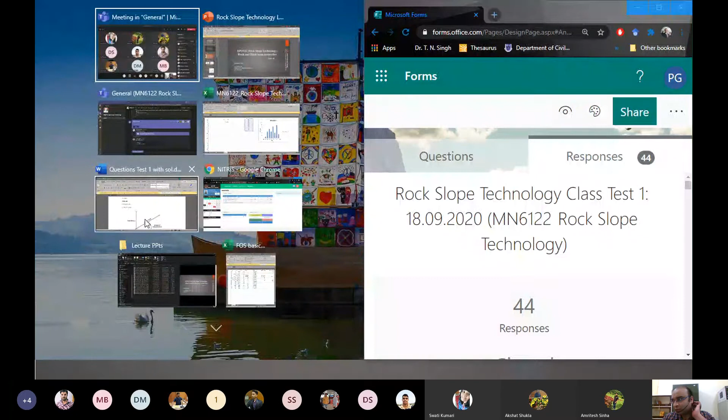What I wanted to see was if anyone has any issues with any of the questions, but we can also do one thing - we can go through quickly anything that had some issues. So I have some statistics with me.

MS Teams provides that. So the first question was about fly ash - I think quite a good amount, 75% almost, of students were correct.

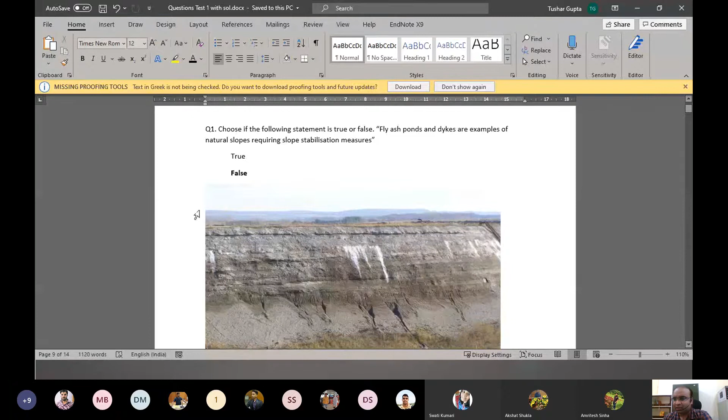So the point in the fly ash question was about natural slopes. The statement said fly ash ponds are natural slopes, but that's untrue - these are man-made slopes, generally made when coal is burnt in a power plant, and fly ash, basically a residue, has to be stored somewhere. We discussed in our first class how different types of slopes are there and which are the natural and man-made slopes. So fly ash is a man-made slope, not a natural slope. That's why the question was false.

Okay, let's keep them side by side. I think that will be easy. Which questions were the most problematic? We'll see. So the next question was about what is the scope of a slope engineer?

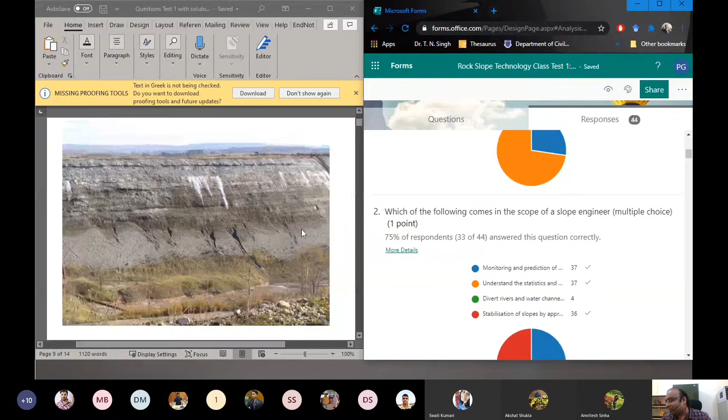I think this was quite obvious, except for the diversion of rivers and water channels. I think all other things were in our scope. So as an engineer, we have to see all these things: stabilization, understanding of the statics and dynamics, and monitoring. So everything comes - this option was just given as a false option.

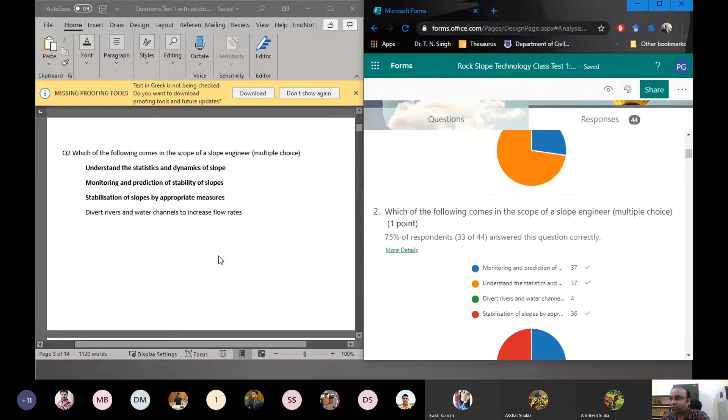So the work of diverting rivers and water channels is not for a slope engineer - it's for the civil engineers who are working on that side. And a good example is, if you are aware of Umrer mine, there is a mine in Western Coalfields Limited, Umrer mine.

It used to have a big dragline, and the dragline was used to put the overburden material from one place to another, and a river went through nearby. So what they did was, because initially the river was going through the property of the mining lease, they diverted that river for working purposes. Slowly and gradually, the river actually started getting through the main mining area as the depth increased, and some improper control happened so that the base on which the dragline was established got weakened due to that river, and the full base failed along with the dragline.

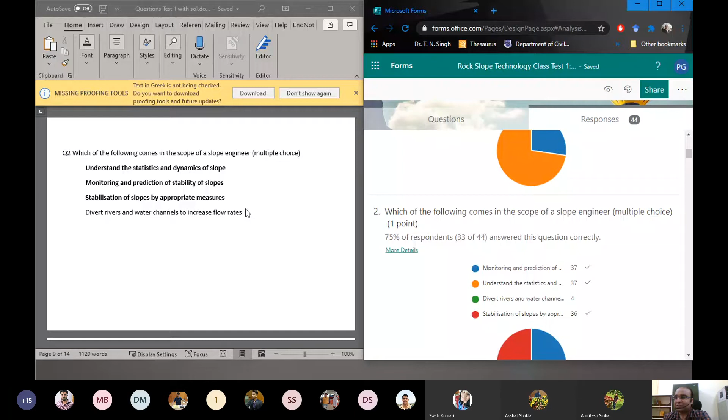So that was an interesting case where rivers and channels were also involved, but that's not strictly the work of a slope engineer in general sense. So that was one.

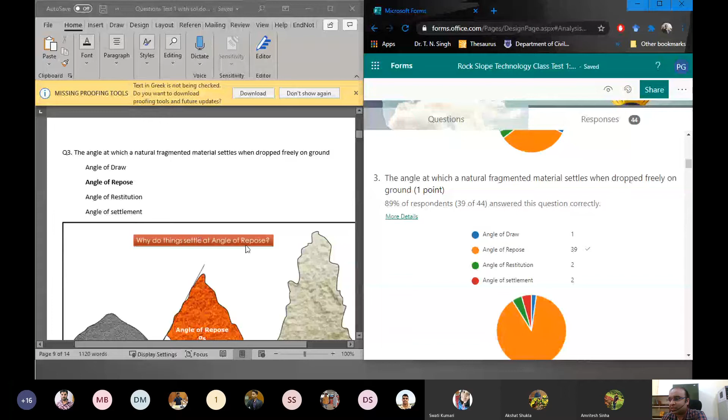This question I think most of you got - what is the natural angle that fragmented material takes when they are dropped? So angle of repose is that. We studied about that, why angle of repose is what it is, which are the factors affecting angle of repose. And then we had the adhesion cohesion question.

The point was attractive forces between similar particles. I think whoever got confused might have been confused due to the figure. What we learned was cohesion is between similar particles, adhesion is between dissimilar particles - very easy. So most of you got that correct.

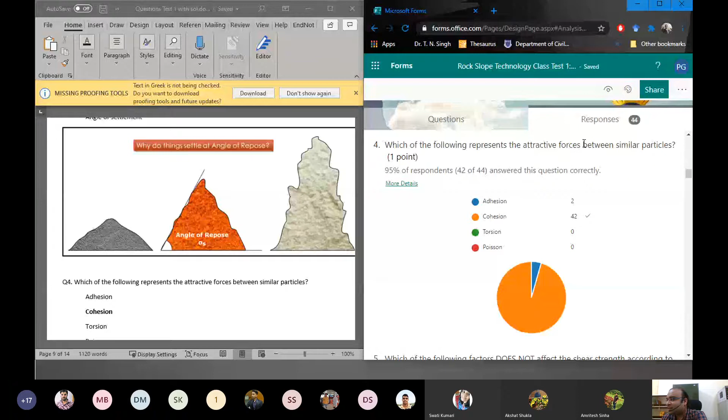This was about which factors do not affect shear strength, and this part was very important. That's why I boldened it up. It's basically very simple.

This is the Mohr-Coulomb criteria, and we see which are the variables. So sigma, phi, and c are the three things affecting shear strength. So those should not be correct options. The only correct option is shear stress, which doesn't directly change the shear strength of any material.

That was the correct option. I think some of you got confused with friction as well. So friction is here as tan phi. Tan phi is basically the friction component. Do remember that.

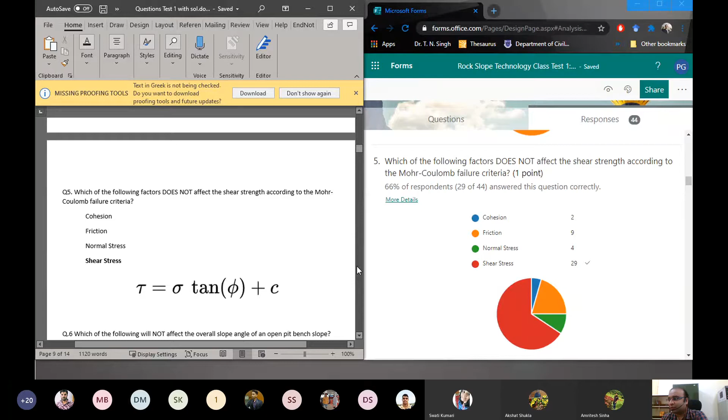Next, this was about the stability of the slope, which does not affect the stability of slope. I think it was a very simple question, so most of you have got this.

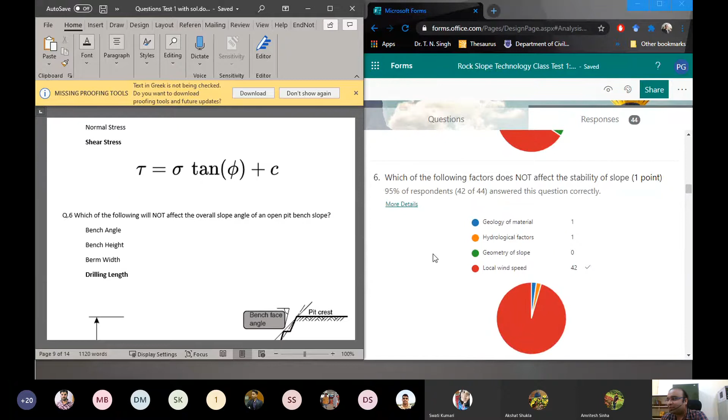So those who have not: it's local wind speed. Even though it may have an effect of erosion over a long term, it may erode the slopes, but on the time scale we work on, local wind speed is not considered for our slope stability issues. Other properties like geology, hydrology, geometry are much more sensitive. So the last option was incorrect, or the correct option in that sense.

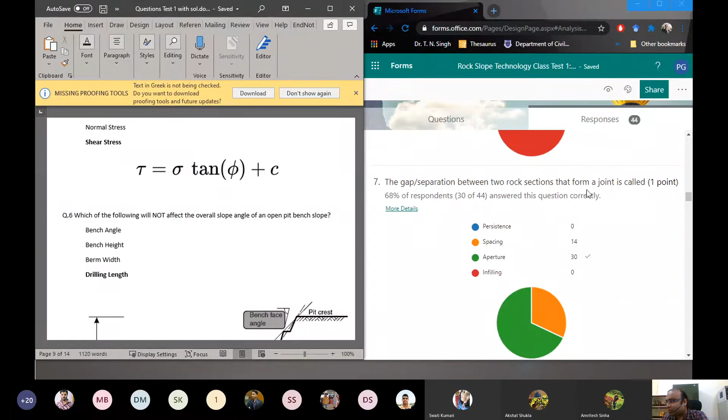Next was the gap. The gap or separation between two rock sections that form a joint is called. I think many of you were actually confused in this, so let me show you what it actually means.

We discussed this once. What is spacing? Spacing is actually the gap between two sets of joints. If these two joints are there, the distance between these two joints is spacing. But that's not what the question wants. The question is the gap or separation between two rock sections that form a joint.

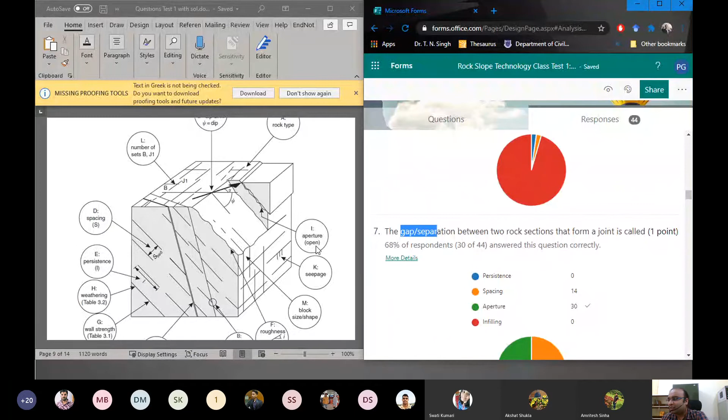So it basically wants to know what this gap is called. This gap we discussed is called aperture. Aperture is basically the middle lying area. It can be open, then we talk about aperture. If it is closed or filled, we talk about width. It can be filled or not filled based on what kind of joint it is. So this is called the aperture of a joint.

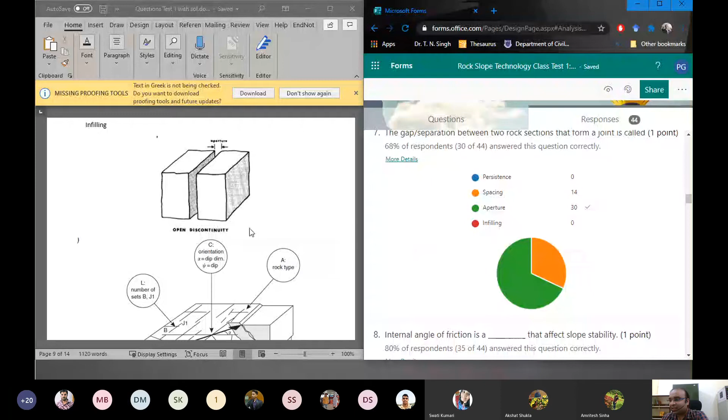Between the two rocks, that's what the question asked. I think 68% of you got that, which is good. This might be a little confusing, spacing and aperture. So that's the difference we have to know: spacing is between two joints, and aperture is a single joint gap created due to that discontinuity being there.

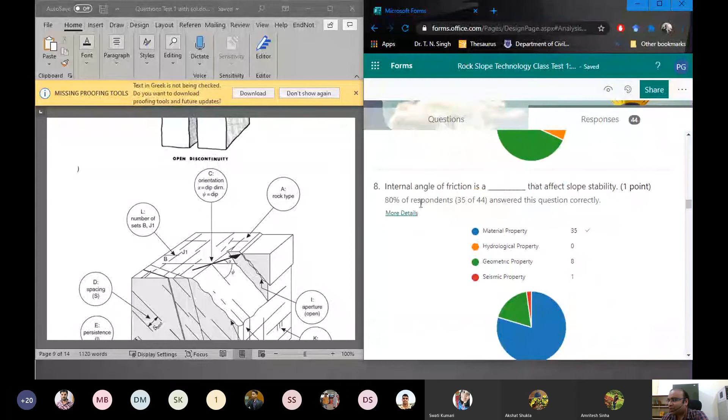Internal angle of friction is a material property. Do not confuse it with friction or the friction angle. It is a bulk property of material, but some people got it confused with geometry. There is a difference between internal angle of friction and any other friction we talk about. We'll cover that later on.

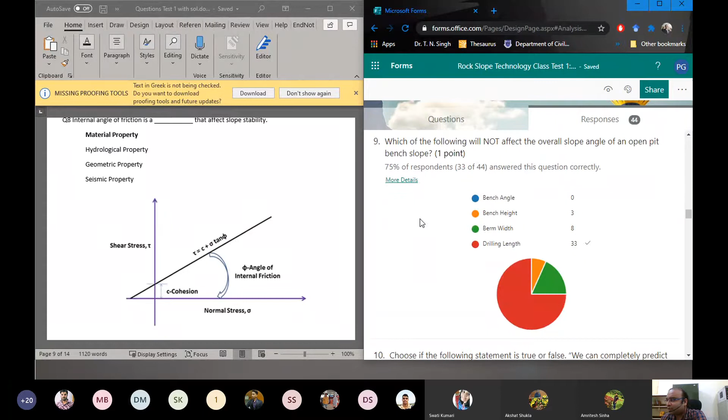And what next, this was: which of the following factors does not affect the overall slope angle of the pit? For that, a very simple exercise was how we calculate the open pit overall slope angle.

We had to know about bench width, bench height, bench angle, ramp or berm width, all these things we have to find out. So that's why drilling length here was an incorrect option. Even though in some cases bench height may be dependent on drilling length, it's not strictly a factor by which we calculate the overall slope angle of the mine or open pit. So drilling length was the correct option.

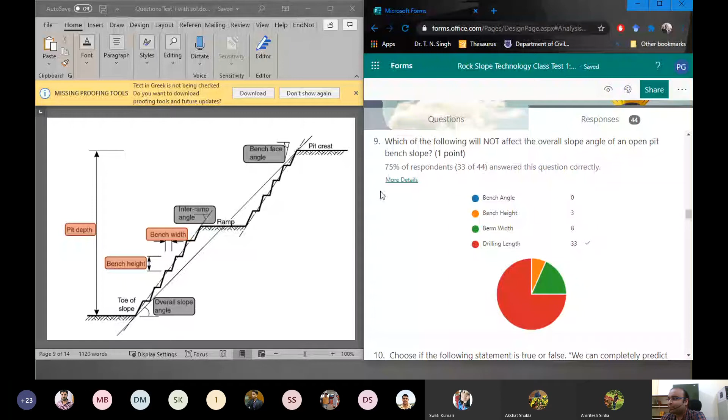Berm width is the bench width, or the difference in the horizontal things that are there. Ramp is also one of the factors, so berm width was that. Bench height you are aware of, and bench angle also, that's quite clear. So this was about how we calculate the overall slope angle, quite simple in this case.

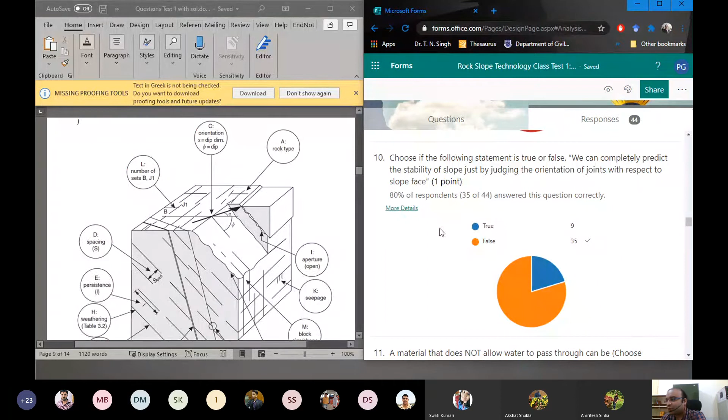We can completely predict the stability of the slope just by judging the orientation. We have seen many times that apart from orientation, there are so many factors affecting the joint itself, apart from slope stability. Orientation basically means at what angle the joint is, like dip and dip direction, but that alone won't be sufficient. There is friction, spacing, and so many other things. That's why 'we can completely predict stability by judging orientation' is incorrect.

So that's why it was false. False was the correct answer here.

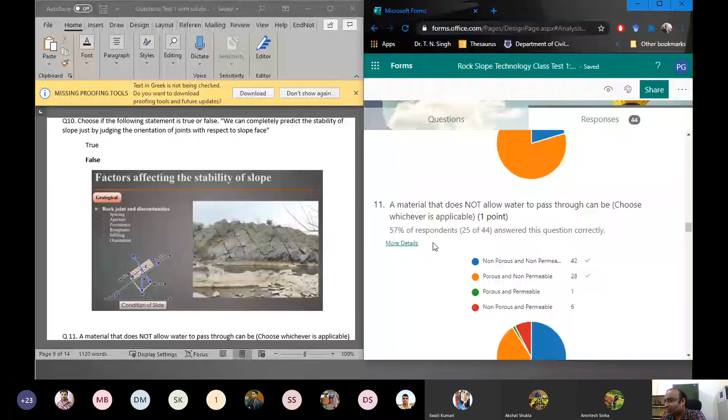And next was: the material does not allow water. So in this case, what we have to remember is something we learned about porosity and permeability. What kind of material can be based on what kind of pores are there inside and how connected they are, right? So a material can be like...

...non-porous, a totally non-porous material that doesn't have pores at all, so there will be no place from which any fluid or water can pass through, right? Then there can be a substance that has these pores, but they're not connected, like our sandstone or similar material that are porous in nature, but these pores are not interconnected that well, right?

And what else? Then there can be porous and permeable materials. Permeability - as soon as we connect these pores, the material becomes permeable, basically anything that can permeate or pass through. So these combinations of materials can be there, and we had to remember that in order to answer this question completely. So the material that does not allow water to pass through can be one of these.

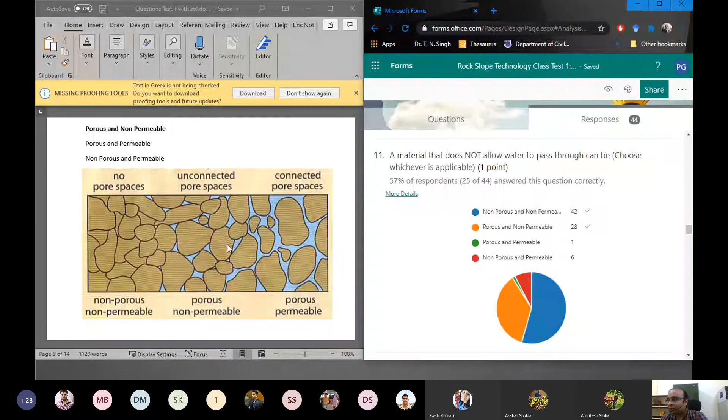So which of these cannot allow pass through? Whichever is not permeable. So the options which have non-permeable in them will be the correct answers.

This last option, non-porous and permeable - this material actually doesn't exist. There is no material that will be highly permeable, allowing material to pass through, but is not porous, except when we artificially drill holes in it. Then a non-porous material can also become permeable, but again that's not a natural material anymore, right? So non-porous and permeable - this kind of natural material doesn't exist basically.

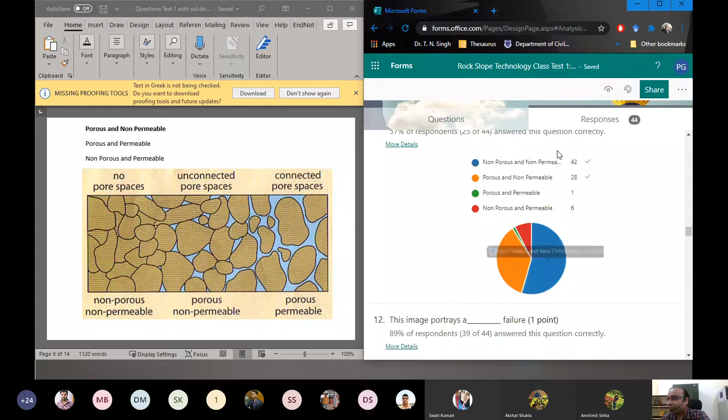So the two top options which were non-permeable, these were the correct answers, right? Quite a good number have already answered that. So good.

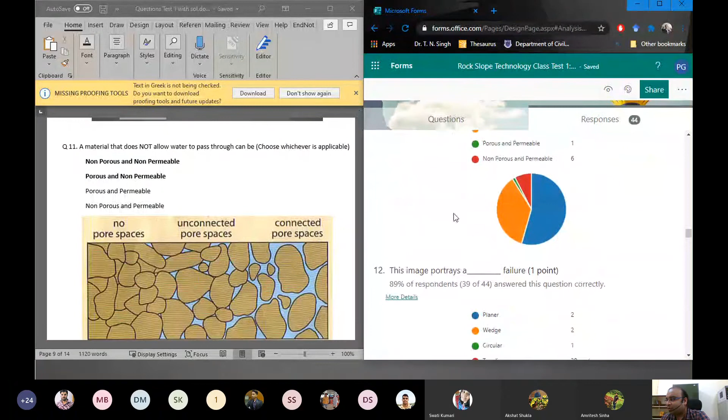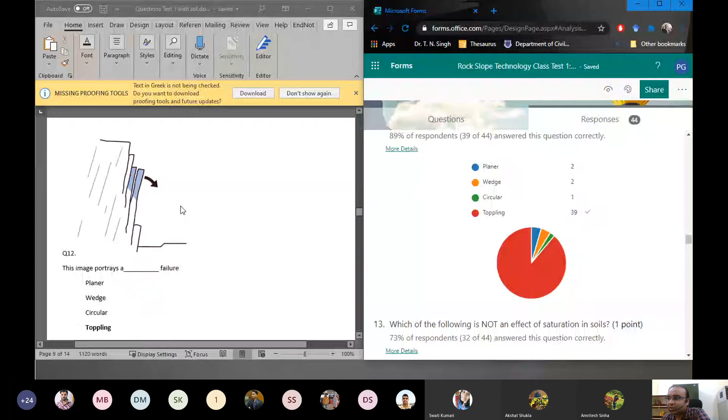And the image portrays - so the image actually was this one. I think some of you guys didn't get to see this image; it was on the left side of the screen being shown. So this basically, we know, is a toppling failure, right? The rocks are basically going to topple in cases where the angle of the discontinuity is against the angle of the face, and it should be such that separation takes place between these rocks or the slabs that are being formed, right?

But because many of you didn't see this image, we gave bonus points to all of you, so this was marked as correct for everyone. But next time we will see what to do about the images thing if any problem like that persists, right?

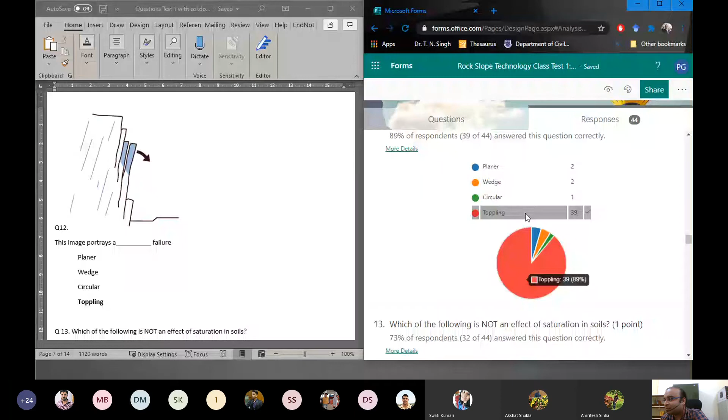So this was toppling. I think a good number already had the correct answer, but everyone else also got the point for that. Which of the following is not an effect of saturation in soil?

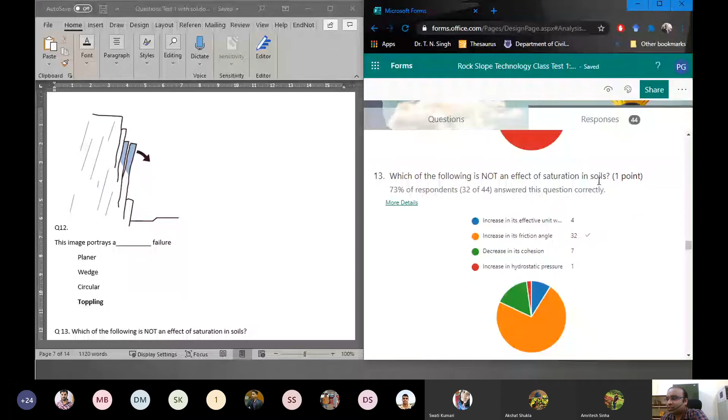So this was once we studied about how the hydrology works. The options were quite clear, but we have to read them a little carefully. So increase in effective weight, effective unit weight - that was because the pores of the material get filled with water, and the unit weight of the whole material when it's saturated basically increases, right?

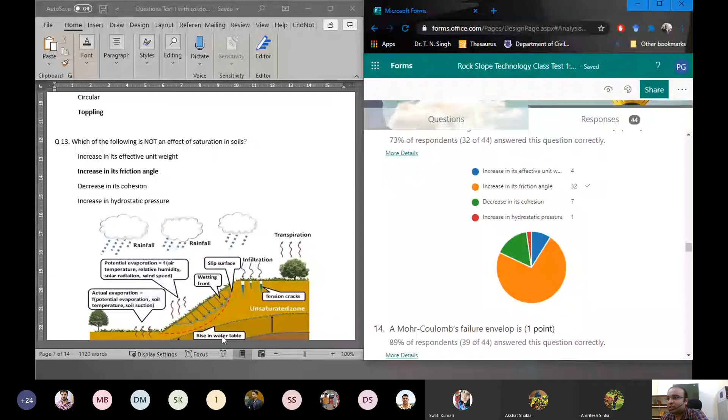Decrease in its cohesion - decreases, as we've seen in so many questions when we did factor of safety calculations, right? The cohesion was supposed to decrease when rains happen. So be it soil, be it a fractured material, be it discontinuous material, any loose components generally will lose cohesion, so their values will decrease.

Increase in hydrostatic pressure - that is most of the time true, because generally drainage is not allowed, and since we're talking about saturation having already happened, we've assumed the drainage has not happened basically. And when drainage has not happened, the hydrostatic pressure has built up. The head of hydrostatic pressure will be calculated by the height of the new water level. So these kinds of experiments or simulations we did when we were doing the hydrological part in finite element analysis or even in limit equilibrium analysis.

So in both of these cases we have not seen an increase in friction angle. Now this doesn't happen with saturation. There might be a decrease in friction due to water acting as a lubricating agent, but it can't increase the friction angle unless some special conditions are there, like a cement kind of material already present in dry state, and with water it reacts to basically form a cement concrete type structure. That can happen, but in general, when we talk about soil and saturation, increase in friction angle doesn't happen. So that was the correct answer. Those were all the effects of saturation, so that's why increase in friction angle is the answer.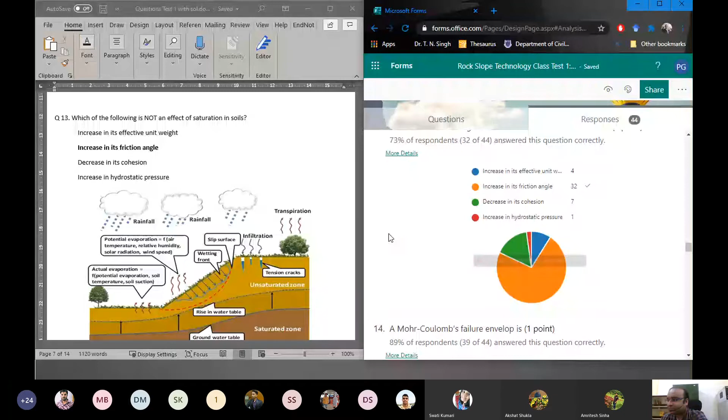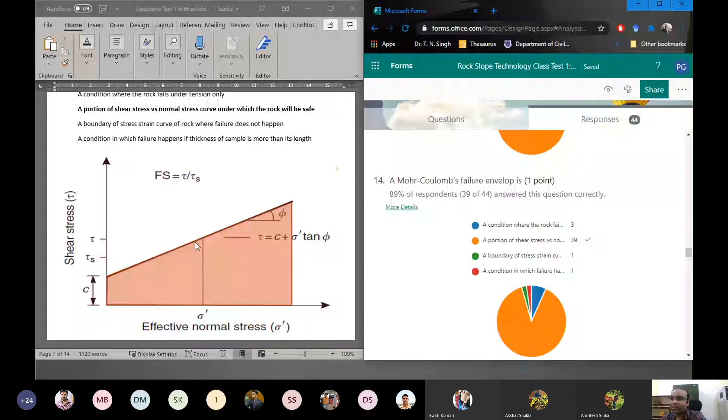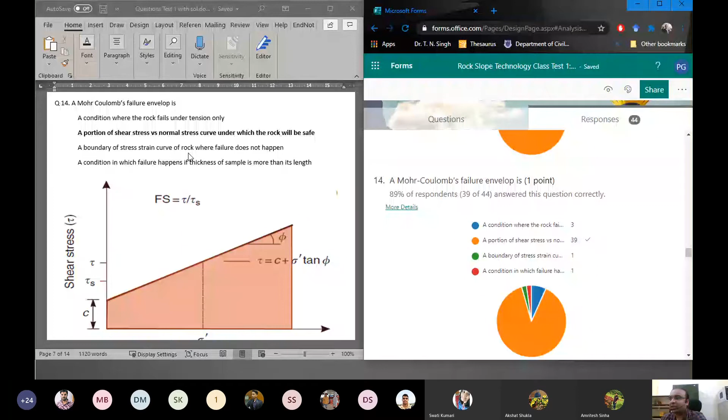The other options were just some other things: a condition where the rock fails under tension only, that is tensile stress - that's different. Boundary of stress strain curve of rock where failure does not happen - again, stress strain curve is not what we're talking about here. And condition in which failure happens if the thickness of the sample is more than its length - a very different condition. So nothing in relation with Mohr-Coulomb's failure criteria. So the second option was correct. I think almost all of you except one or two have answered this correctly, so quite good work.

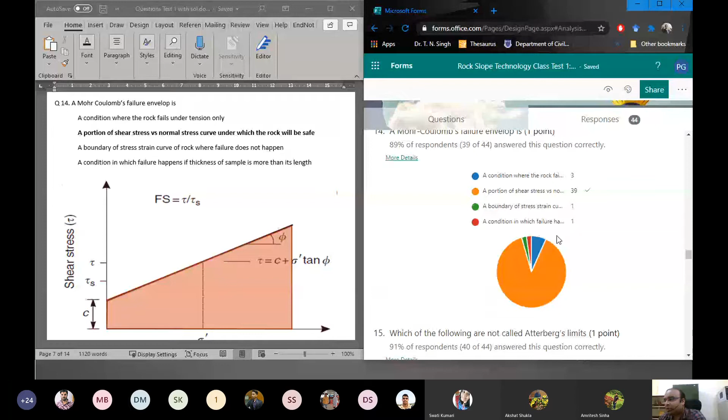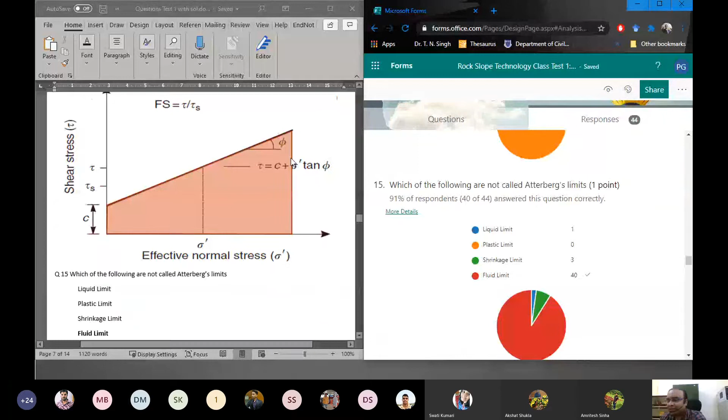Which of the following are not Atterberg limits? We discussed Atterberg limits briefly - what they are and what they are called. Liquid limit is the point where, after a certain water content, the soil or material starts behaving as a liquid. Plastic limit was the limit after which it starts behaving in a plastic manner, where the stress strain curve goes straight. So that was plastic limit.

Shrinkage limit was a point after which, if you removed the water content further, it won't decrease any further. So any shrinkage happening due to removal of water content while drying doesn't affect the volume change beyond that point - that's called the shrinkage limit. And fluid limit is not relevant here, but these three - liquid, plastic, and shrinkage limit - are called Atterberg limits. Generally these kinds of curves are made, and tests for all these limits are very different; a single test for all is not done, and all three values are calculated by different tests. We'll discuss in upcoming lectures how these Atterberg limits are calculated. So fluid limit was the incorrect choice, and quite a good number have again chosen the correct one.

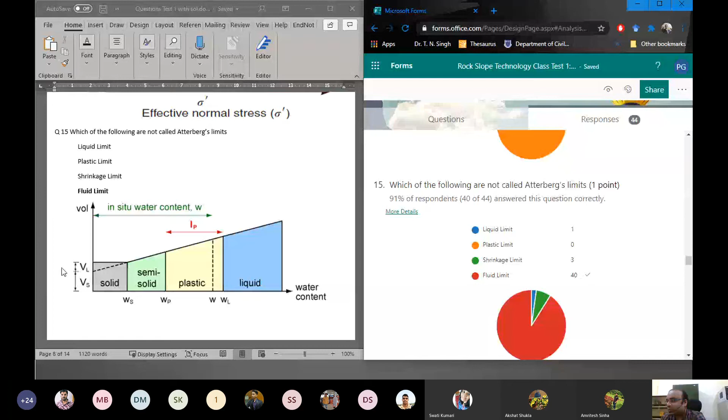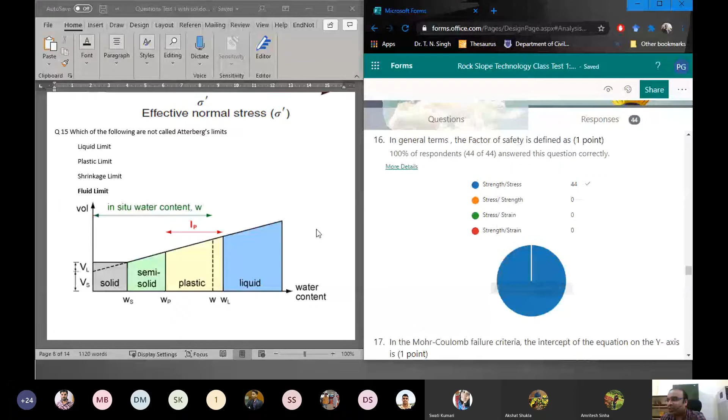The intercept of the equation on the y-axis for Mohr-Coulomb failure criteria. Just remember, when we saw the Mohr-Coulomb failure criteria, tau equals C plus sigma tan phi. Anything on the slope of this line basically gives us friction, internal friction. C gives us the intercept here. So the intercept on the y-axis is cohesion. So friction is the slope, but the intercept is cohesion - that's the difference. So the correct answer was cohesion.

In the next one, choose whichever statement is correct. Even though it was multiple choice, only one answer was correct. Somehow I think this should not have been multiple choice, but anyways.

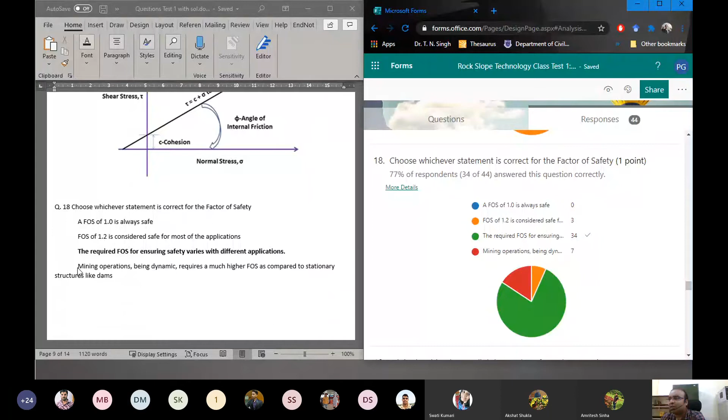This we were discussing when factor of safety was being taught, right? So factor of safety 1 is always safe - that is incorrect. 1.0 is basically a critically safe point, and it's almost never considered safe in most cases. It indicates a condition where the stresses are just equal to the strength. Any change in stresses will cause a failure, so it is very critically safe, not always safe.

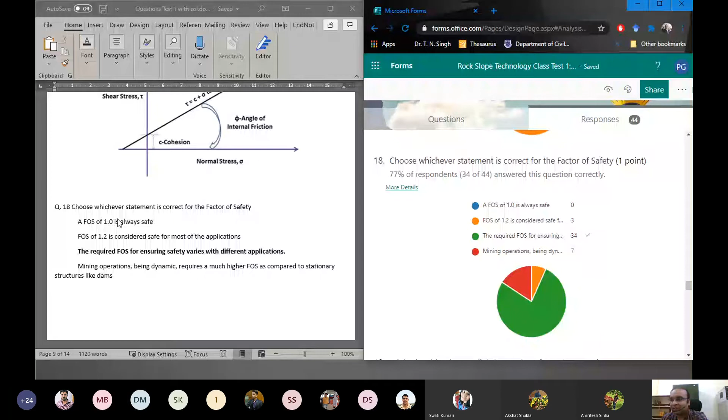Factor of safety of 1.2 is considered safe for most applications - that is again incorrect, because as per the correct answer, the required factor of safety for ensuring safety varies with different applications. We were discussing this about mines, about dams, about civil structures. So for each, there is a different critical factor of safety considered as the minimum requirement. That's what the correct option was.

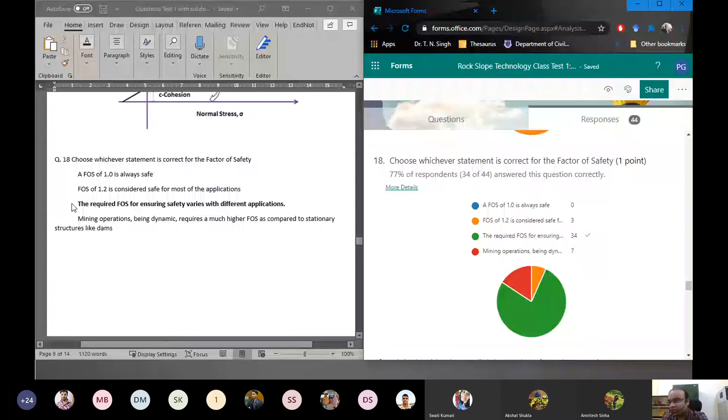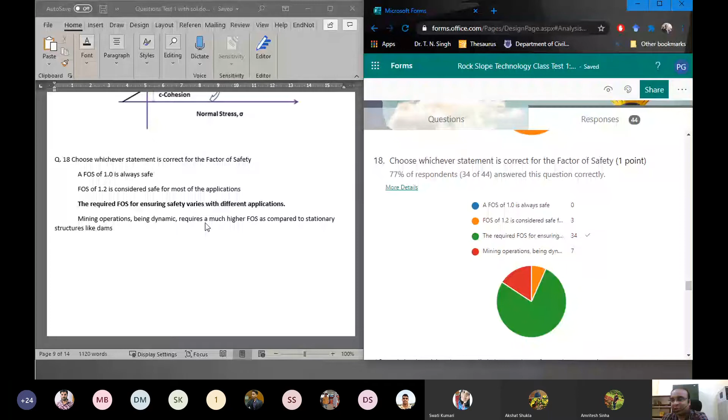The last option said mining operations being dynamic requires much higher factor of safety compared to stationary structures like dams - that was actually the opposite. Mines are dynamic but require very less factor of safety due to that same reason, compared to stationary structures which do not move. So dams, roads require much higher factor of safety, right? We discussed this in one of the classes. So the correct answer was the third one.

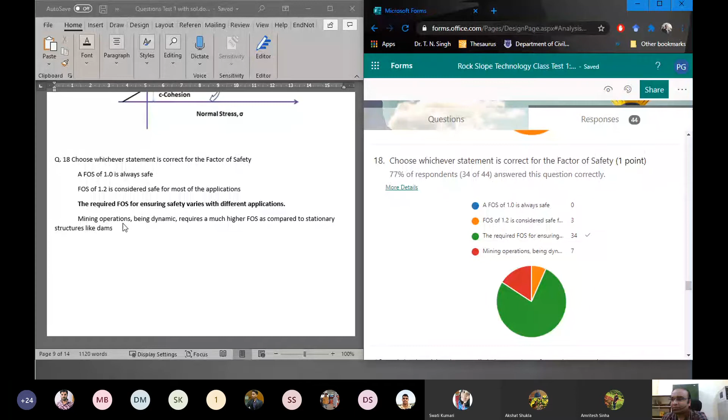Okay, daylighting - I think most of you got it, but the condition is the condition of sliding that we saw in many examples. The condition is very simple: when the angle of the discontinuity is less than the angle of the slope, and it is inclined towards the slope, that is the condition of daylighting. The joint is inclined towards the face of the slope with slope dip greater than the joint dip.

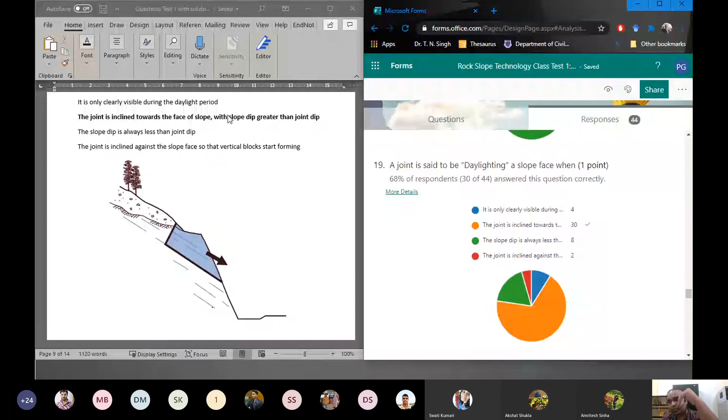So do remember that, if you have any confusion about daylighting. Daylighting basically is when these joints get exposed to the slope. So the only condition when they will be exposed to the slope is when the slope dip is greater than the joint dip. When this angle is greater than the joint angle, then these joints will be exposed on the slope. Otherwise they will either be inside or on top. So the condition of exposure is called daylighting - that's how you can remember it.

The other options were: clearly visible during daylight - that's just for the namesake. Slope dip is always less than joint dip - that's the opposite of the correct answer. And the joint is inclined against the slope - that is a condition of toppling failure. So that's not it. So this was the correct answer.

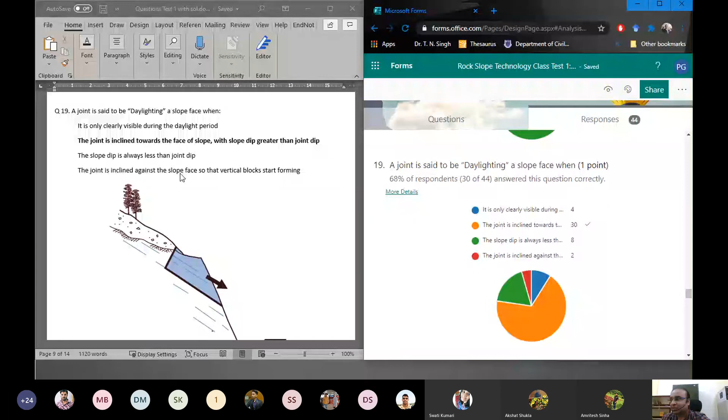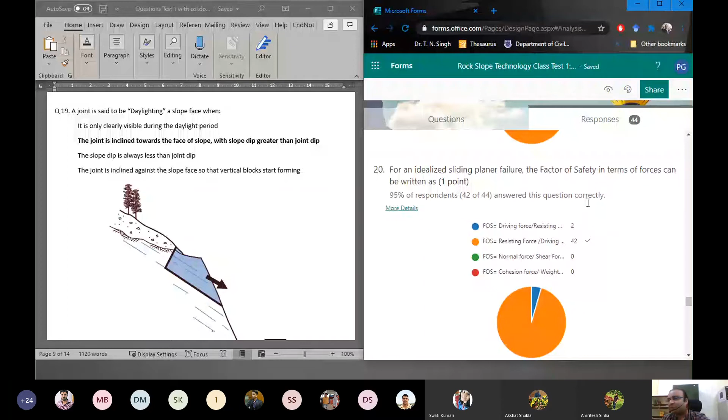And finally in MCQs, we had: for an idealized sliding planar failure, the factor of safety in terms of forces can be written very simply as resistive force by driving force. No need to get confused by the opposite one. I think most of you got it, so that was correct - resisting force by driving force, that was it.

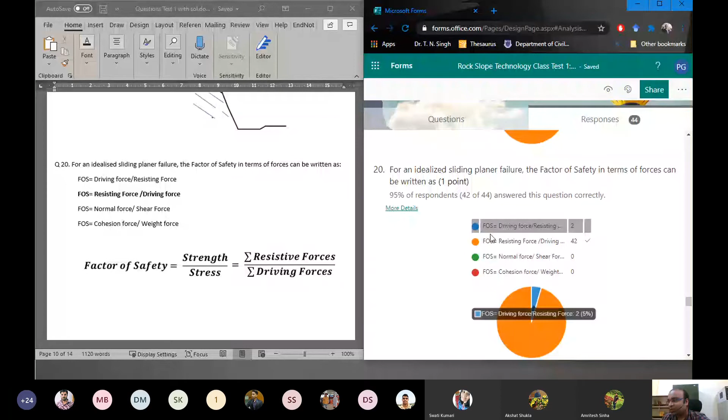So MCQs in that way, apart from few confusing terms, I think most of these were very simple. I would have liked that all of you would have got these, but yeah, that's okay.

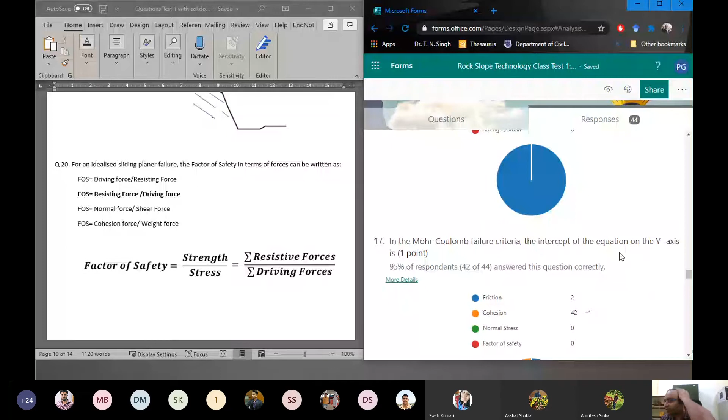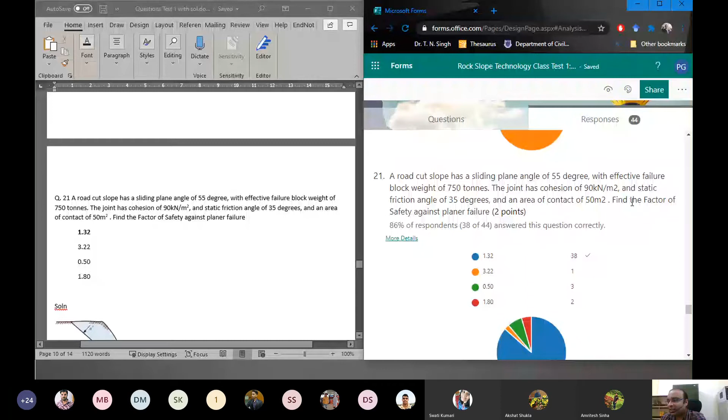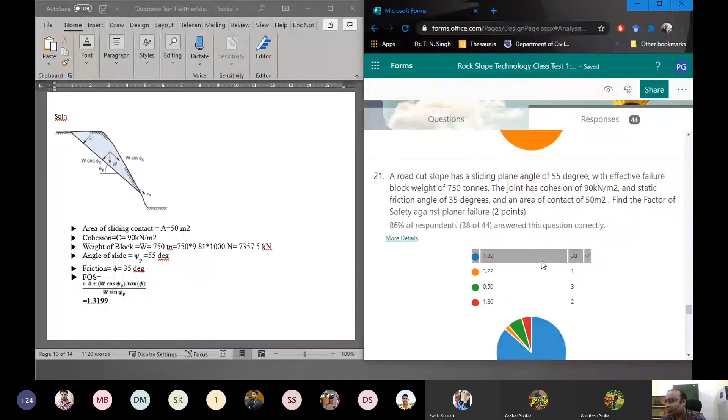So we had all the values given: area 50. We just had to convert the weight of the block, 750 tons, into kilonewtons - that we have to take care of. All other things were directly given. We applied the formula and got 1.3199, and the option was 1.32. Most of you got it, but for anyone who didn't, this was the way we do it. For the second question, I don't know why many people got it wrong.

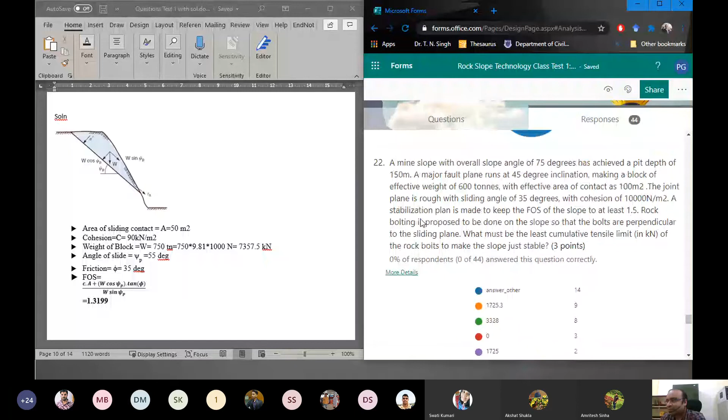Some confusion was there between these values, 1725. I couldn't find out where you went wrong with this. The correct answer was basically 3325.8 or 3326. But any answer that is close because of approximations, I have given it as correct. So 3328, 3323, 3325 are all marked as correct. The concept was very simple.

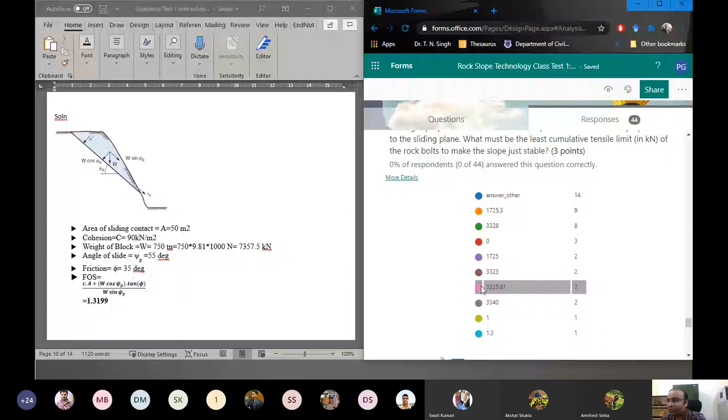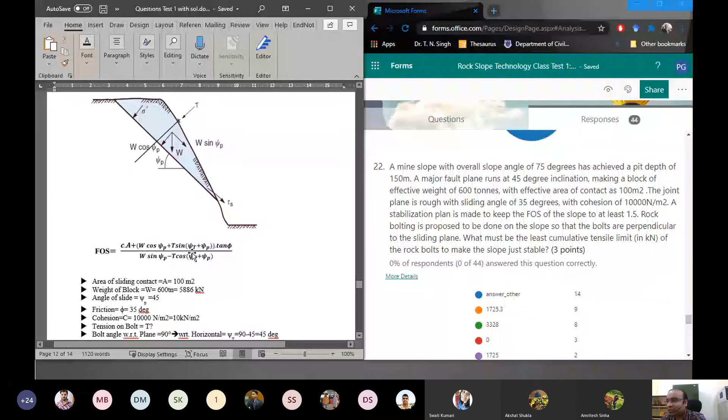Again, we were working on this condition of rock bolts. We basically wanted to know the angle of T with respect to horizontal. We had to find out finally what will be the T if the factor of safety was 1.5. So area was given again, weight of the block again was given.

Even in this, if you might have seen the question, this whole starting part of data was not required at all, so it was not used. Mine slope overall 75 degrees and pit depth of 150 meters, it was not used here. Actually, I wanted to create a bigger question, but I don't think time was there, so those 3 points we couldn't include. This was just extra information, not used anywhere.

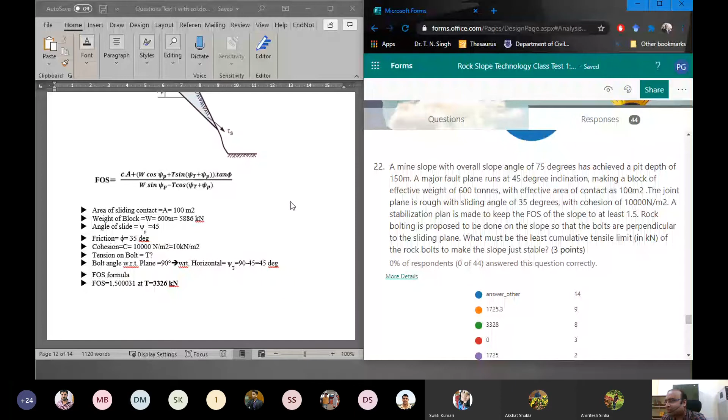So for solving it, we had area given as 100 meters square, and weight given as 600 tons, which was converted into kilonewtons. Angle of sliding was given, friction angle was given, and most things were already given, except that the cohesion was given as 10,000 newtons, so we had to convert it into 10 kilonewtons. And with this, it was important to locate the bolt.

The rock bolting is proposed and the bolt is perpendicular to the sliding plane. So we had to basically convert the bolt angle with respect to plane to bolt angle with respect to horizontal. That was simple, because it is 90 degrees with respect to the plane, which is inclined at 45 degrees.

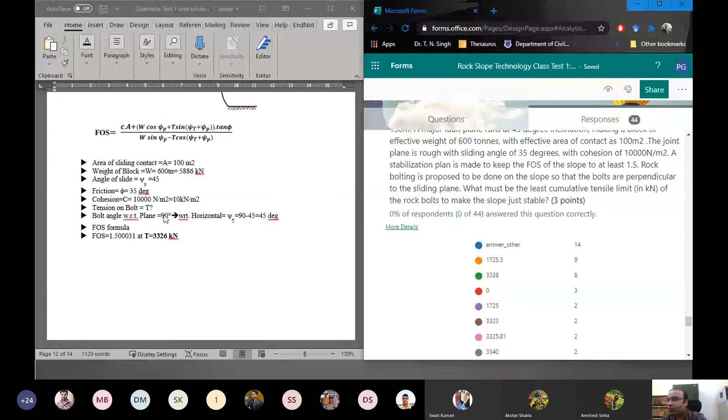That was easily done, and that's why the factor of safety, when we kept the factor of safety as 1.5, the T was found to be 3326. So the answer was 3326. All close ones were marked correct. The last one, which most of you didn't get, and I think if image issues were there, it was a bit difficult.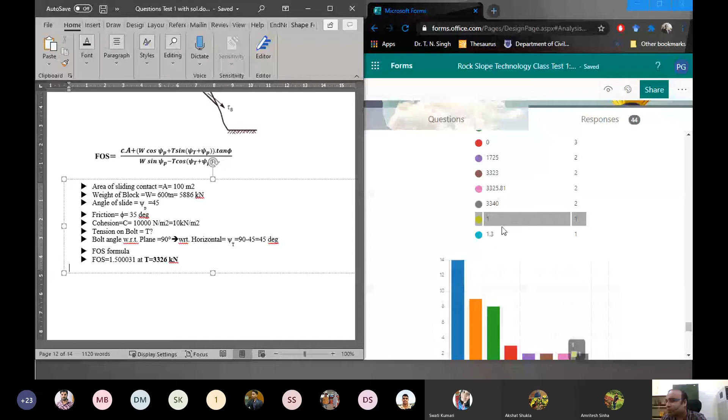But this was the image. Let me zoom this one. So we did this on the A side. We did the derivation in the assignment, and the B one we already took as an example in our class, so nothing else was there.

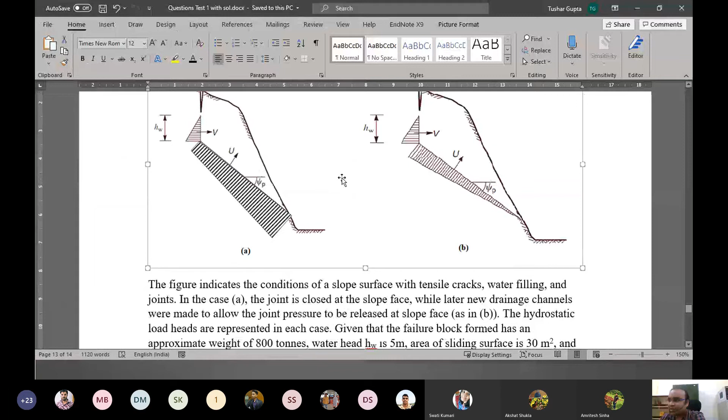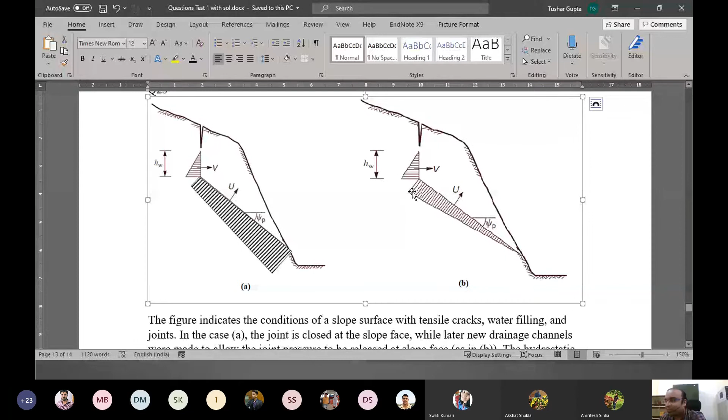We just had to basically take these two conditions given and find the factor of safety. U and V, the main thing was to calculate the U and the V. In the A case, V as usual was rho g HW into HW into 0.5, that is half into rho g H, that was the head, into half base into height. The base of this triangle will be rho g HW, that is the head, and height is HW. That was the V, that's how we calculated it.

The second was, last time we calculated it as half base, that is rho g HW into height, that was A. So for the B case, that was easy, half rho g HW into A. But for this case, instead of transforming from a triangular shape, it has transformed because being closed at one end, the pressure has increased.

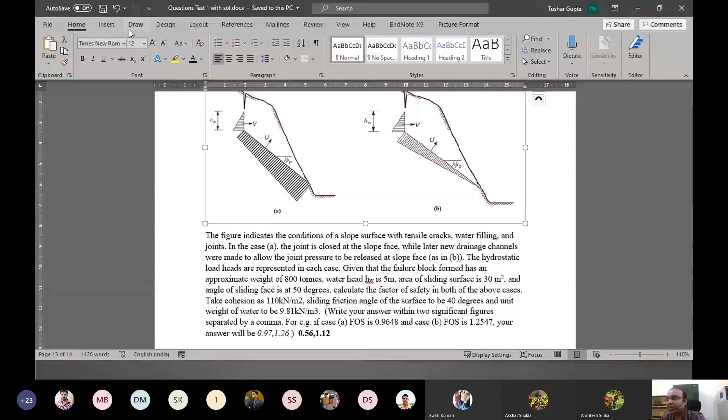So increase in pressure has made this part rho GH, similar to this, but the effective head at the last point will increase. If we say this portion till here is the additional head that was added, and this is assumed as A, then this will be A sine psi p. That's the only thing we had to do.

So for calculating the whole force, this was just half sum of parallel sides into height. The half sum of parallel sides was rho GHW plus the sum of parallel sides of this one was rho GHW plus this head, which was rho GHW plus rho into G into A sine psi p.

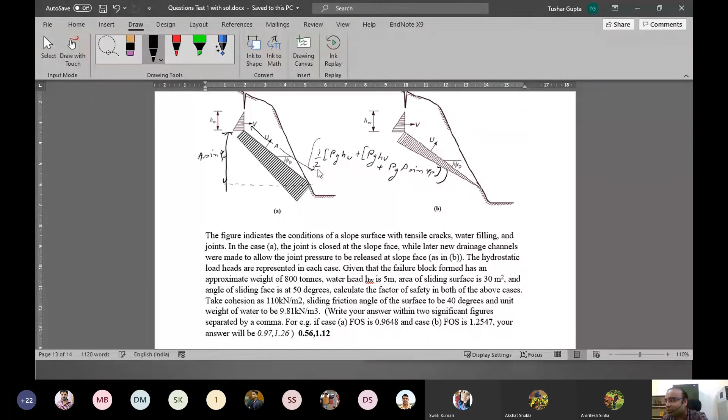Right, that's the whole vertical side of it. Divide it, and for area, into the height, so that will be A. So half rho G HW into A, that was the whole calculation.

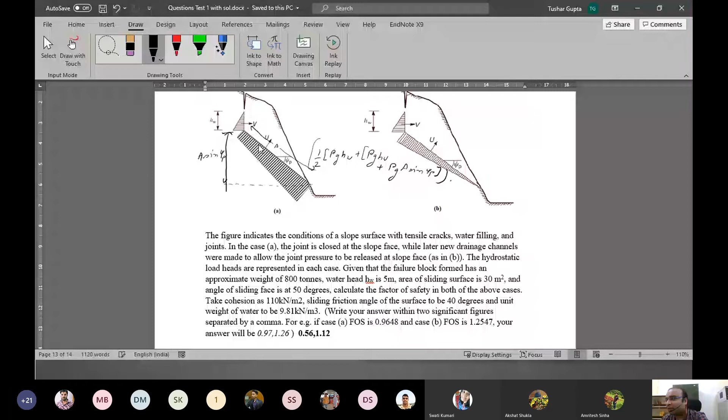And finally we could get U, this one, and then we just had to do this part. Once we had that, all the values were given. A was given as 30 in the question, 30 meters square, right?

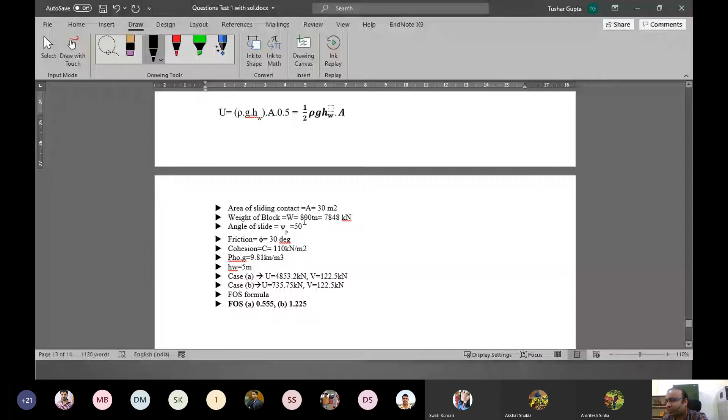Weight was given as 800 tons, converted into kilonewtons. Angle of slide was 50, friction was 30, cohesion was 110, and rho g, the unit weight, was given as 9.81 kilonewton per meter cube. So the value of rho into g was already given.

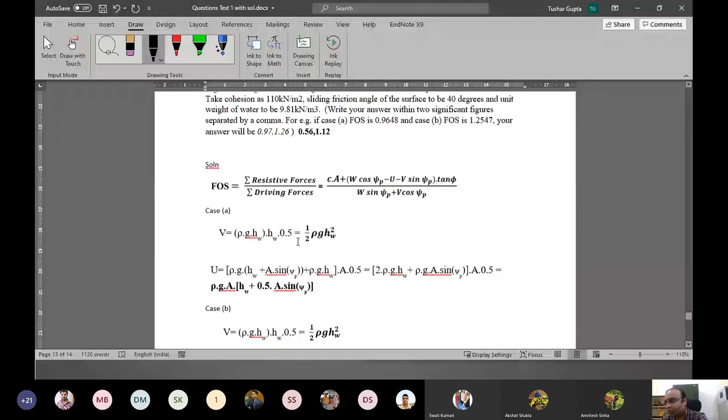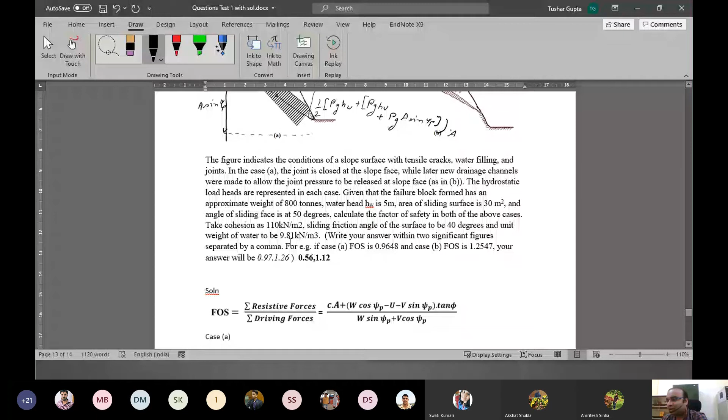So basically it is like 1000 into 9.8 newtons per meter cube, that was 9.81 kilonewtons per meter cube for rho g. H is given. So case 1 we had found UV, case 2 we had found UV, and factor of safety. The answer was 0.56 and 1.26.

Sorry, let me check. Yeah, 1.12 - this is wrong. So 1.12 was the correct answer for the second case, and 0.56 was the correct answer for the first case.

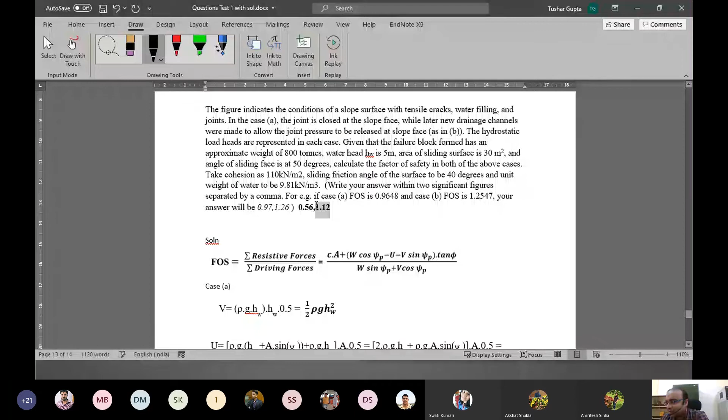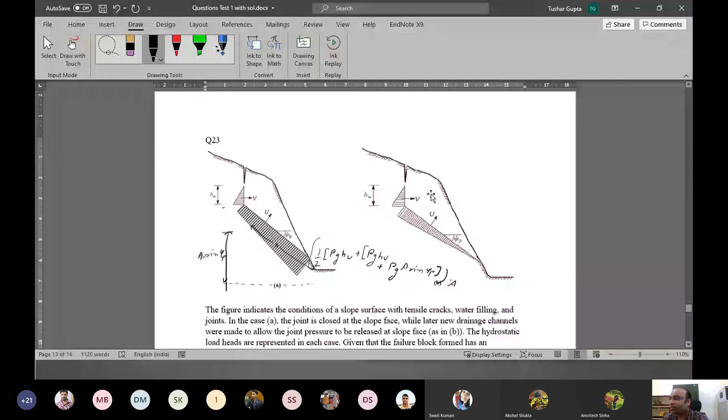That was it for the problem, but because most of you had complained about this image, we didn't count it, so that is not taken in the marking. But that's how this problem was done.

Any questions till now? So everyone saw their results? Everyone happy? Yeah.

Excuse me sir, I have some doubt regarding the berm. Berms are generally the catchments used to catch falling rocks from one bench to another. And another definition of berm is that it's at the end of the bench floor, there for safety purposes. So which one is correct, sir?

So when we talk about berm in mining terms, berm is also defined as the horizontal spacing we leave while going for different benches, which we have also known as berm width or bench width in some cases. Let me show you if I have some images of that.

So for safety considerations of a bench, we give a muck pile at the end of the bench, right? So what is that called, when we give a safety pile?